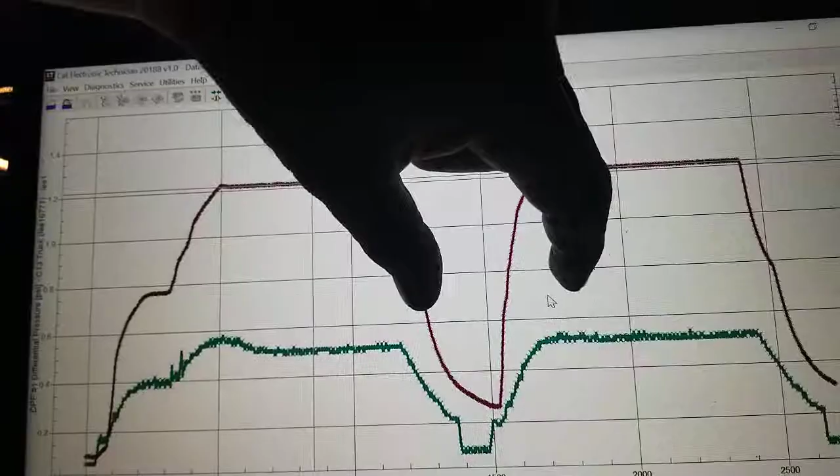So this video is just a quick outline of how a diesel particulate filter works, the basic concept. This right here, the reason you see this, is because we did one regen and then did a second one. That's why you see the drop off, because it cools down, then we hit a second one. We did a second regen, and if you notice, it's a lot shorter than here, because we had already preheated the filter. And if you notice, this is shorter because the filter is already clean, so it takes less time.

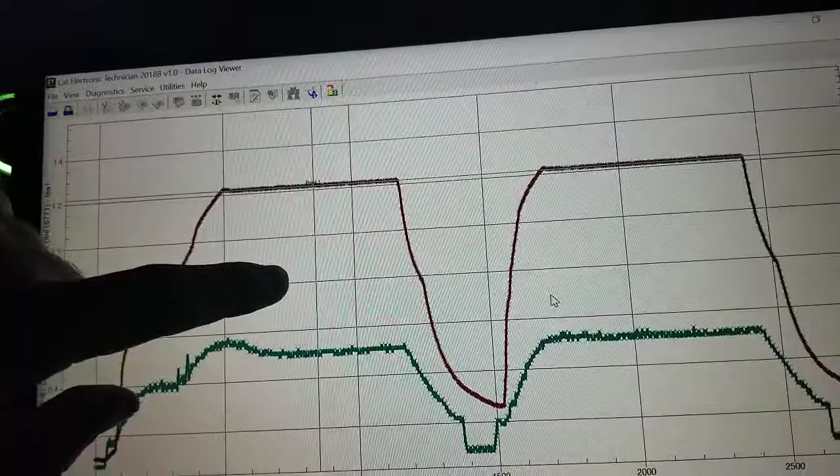And this right here is the way Caterpillar does it. Cummins is a lot different, Cummins takes a lot longer. Even if you do it back to back, it's going to take just as long as it did the first time. Caterpillar's kind of weird because the time actually decreases if you do them back to back.

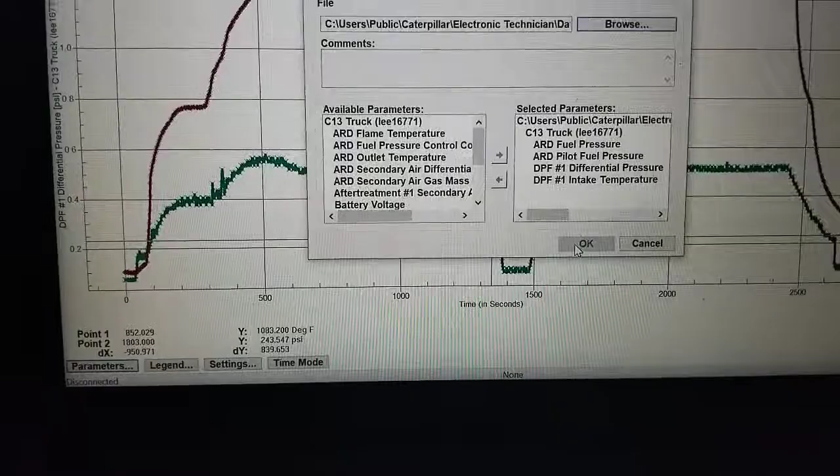So anyway, I hope this helps somebody. I might do a little bit more talking about the DPFs, and maybe we'll get into some of the catalyst reduction system. But one thing I can tell you: you can have a successful regeneration event and yet still be on the edge of having a failure. And this is why it's critical to have people go in here and check. You have all these parameters you can check on the fly while it's running, and it's just amazing what you can do.

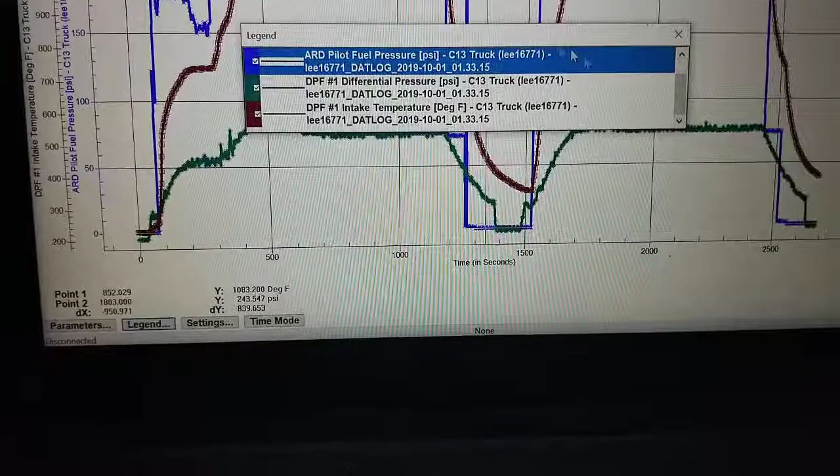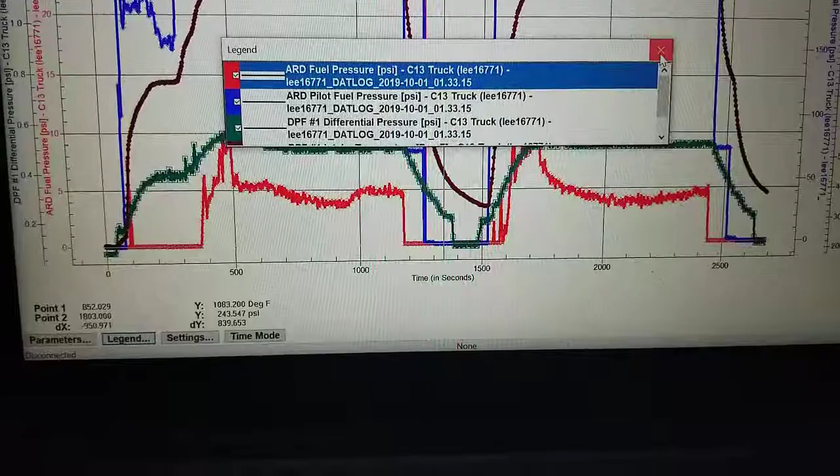But what happens is a lot of people don't do this, they don't monitor the system. So they'll say, oh okay, I forced the regen, it completed, you're good to go. The guy leaves the shop, and then all of a sudden, what happened? It just left the shop and it crashed. That's why there's a lot of data that has to be evaluated, a lot of data.

Kind of think of it like you go to the doctor for a physical, then leave and drop dead 30 minutes later from a heart attack. Well, if you go to the doctor and he checks your blood pressure and it's sky high, that's preventive maintenance, right? But you get to see it. If you go to the doctor and he checks your heart rate and it's too slow or too fast, same thing here. A lot of guys don't know how to do this, they don't know how to maximize the tool to evaluate the parameters to be sure they know what they're looking at, because you can have a successful regen event.

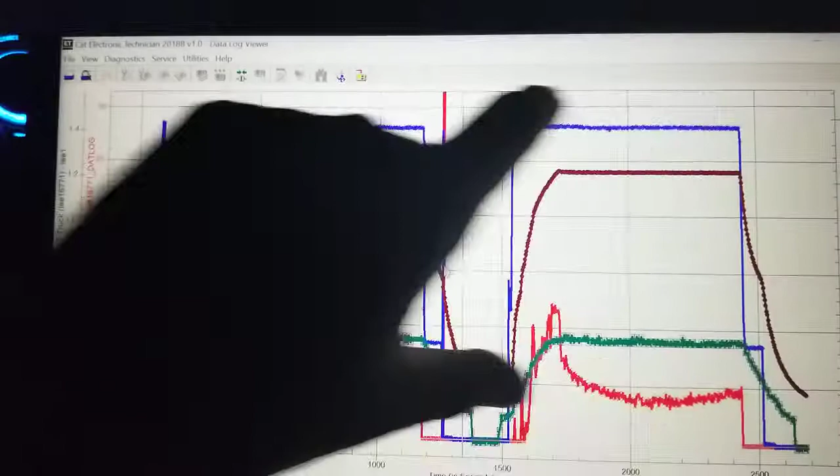The guy leaves, and in an hour or 2 or 3, he's back down in the dirt because something went wrong. This is where, when you do a regeneration and you're able to capture the data and evaluate it, you can find a lot of things that'll give you a hint of what's just around the corner and keep you out of trouble with the customers.